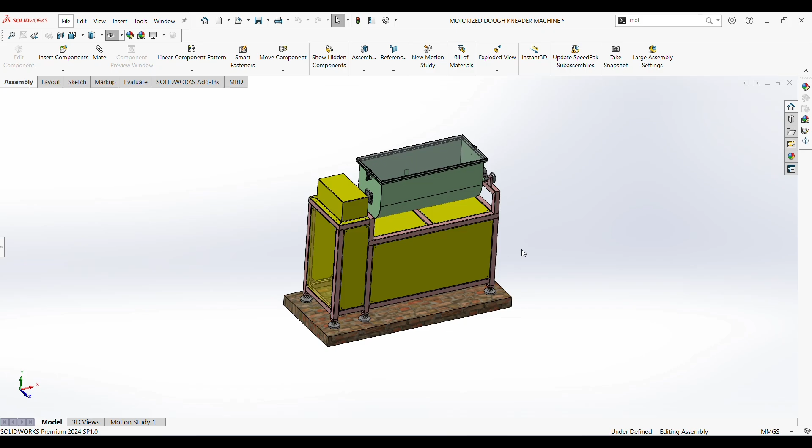In this machine, we optimize our previous machine by removing the manually operated handle and using a motor, which reduces human intervention in operating the dough, increases our production, and reduces human effort. This is the optimized version of our previous manually operated dough kneader machine.

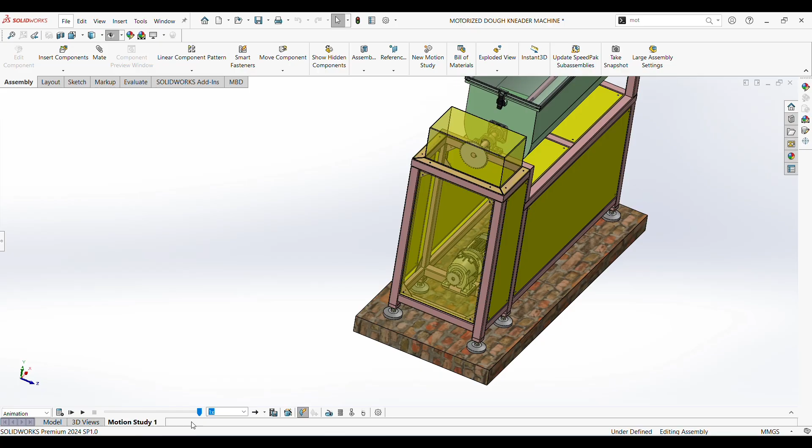So let's see the working of this motorized dough kneader machine. We will go into motion study and play it. This is our working for the motorized dough kneader machine. As you can see, we don't have to rotate our handle to operate this shaft for mixing the dough.

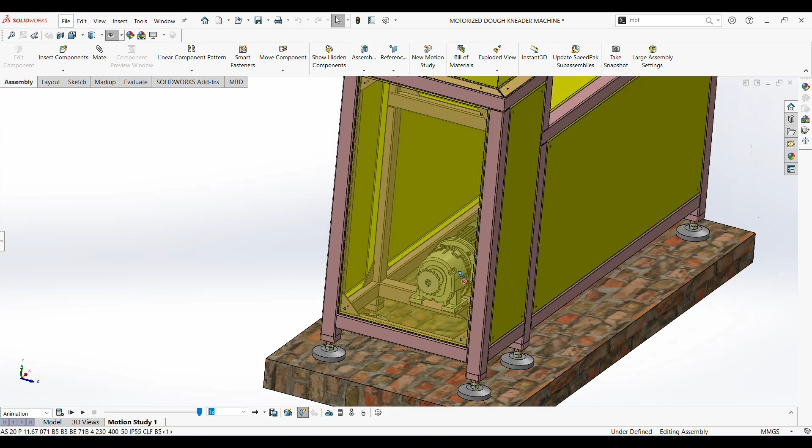Let's see which motor gearbox we have used. This is an inline type AC induction geared motor, and for specification we will see this is the specification of our motor gearbox.

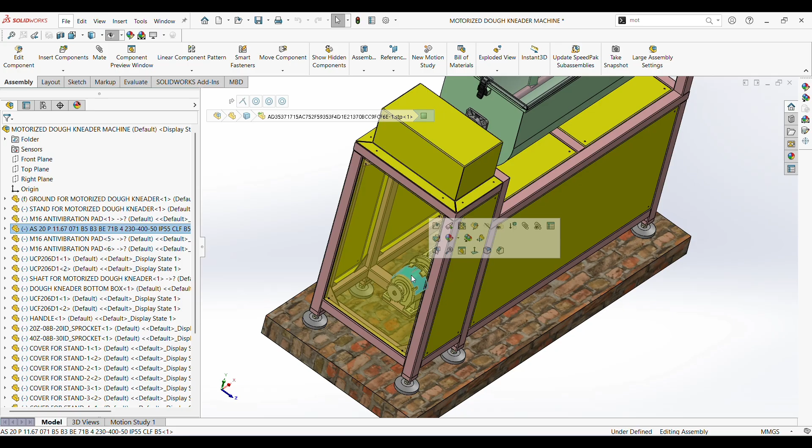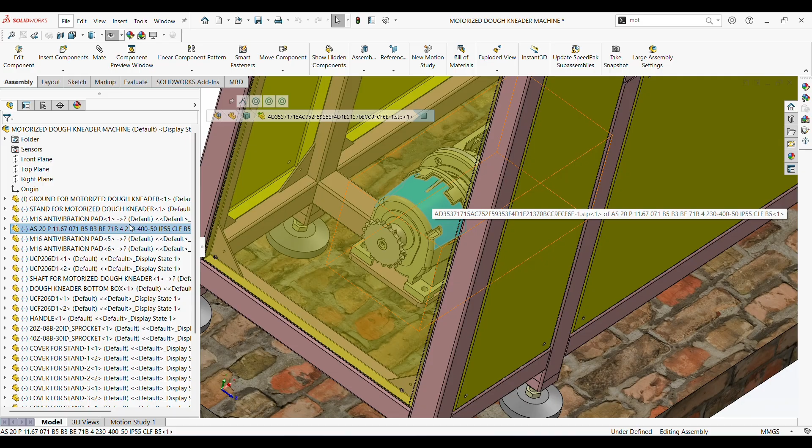Let me tell you what this denotes. AS20 is the gearbox product series. P denotes the foot mounting of this gearbox, whereas 11.67 is the gear ratio of this gearbox, and 071 is the input configuration of the gearbox. B5 and B3 denote motor mounting and mounting position. BE denotes the product series of our AC induction motor, and 71B denotes the frame size of the same motor.

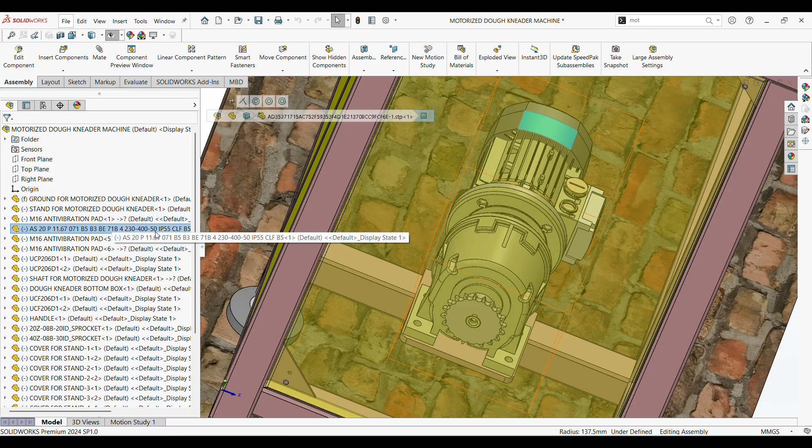Here, 4 denotes the number of poles of our motor, and 230/400 denotes the voltage and frequency. These two voltages are different types, star and delta, and 50 denotes the frequency of this motor. IP55 is the degree of protection of this motor. CLF is the insulation class, whereas B5 denotes the motor mounting flange.

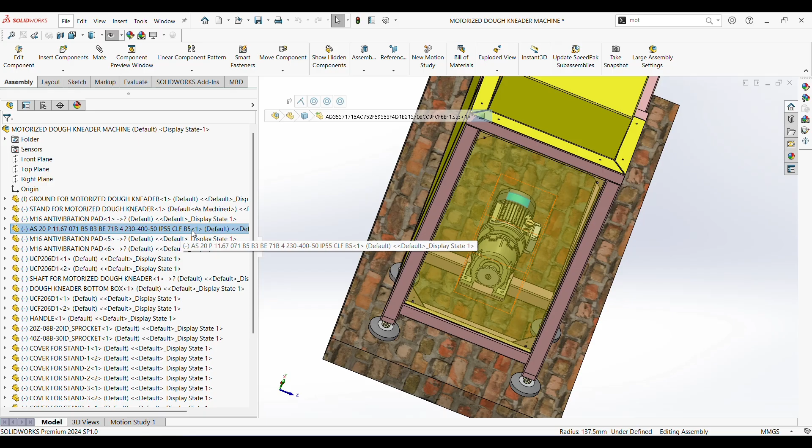This is the product name, not the data sheet. Full name of this product: AS series gear motor. For further detail, we will see the product data sheet of this motor gearbox.

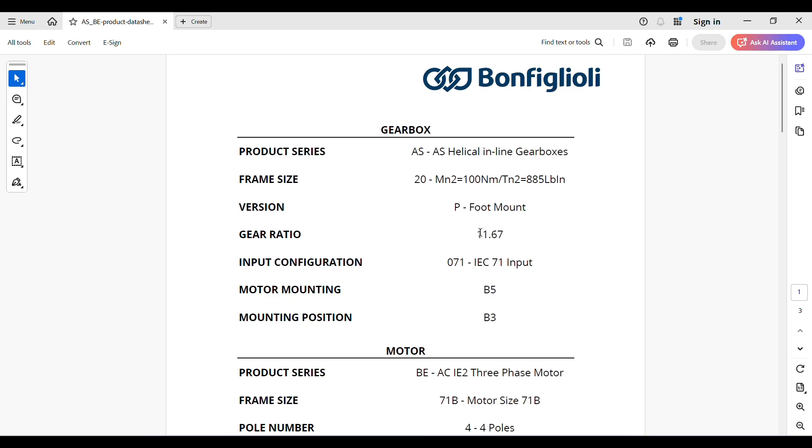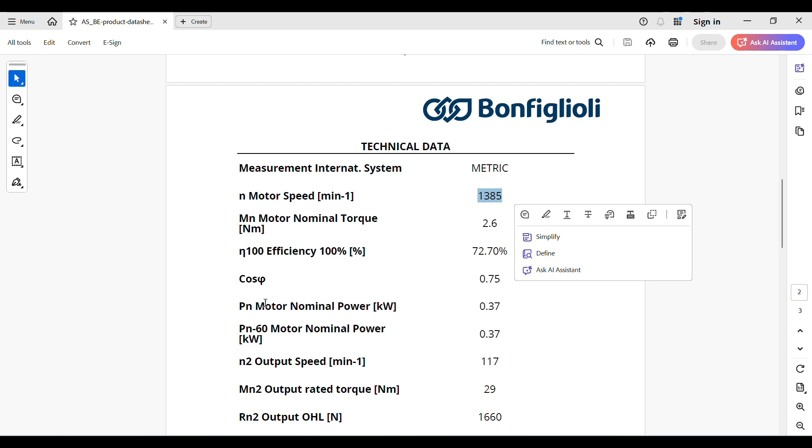So this is the data sheet: AS type helical inline gearbox, and the gear ratio is 11.67. Let's see the output RPM of our motor, which is around 1385, and after dividing by 11.67 we get an output of 117 RPM.

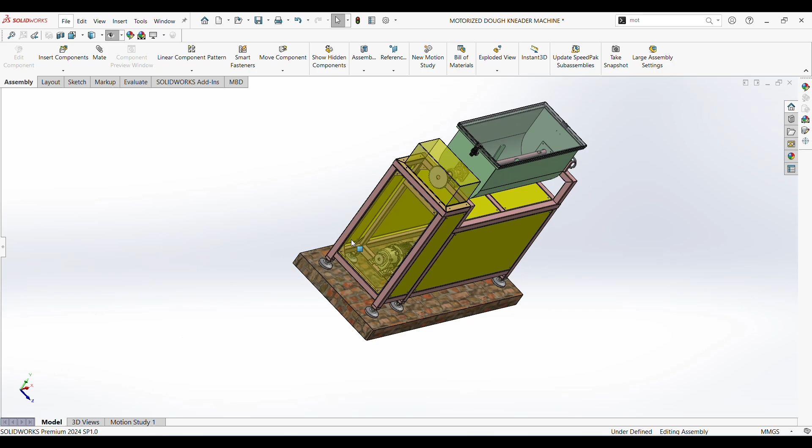So at the sprocket we will get 117 RPM, and after the reduction we will get 59 RPM, because I have used a 0.5 ratio—here I have used 20 teeth, and here I have used 40 teeth. So our reduction will be 0.5, and our output RPM is 59, as you can see in this video.

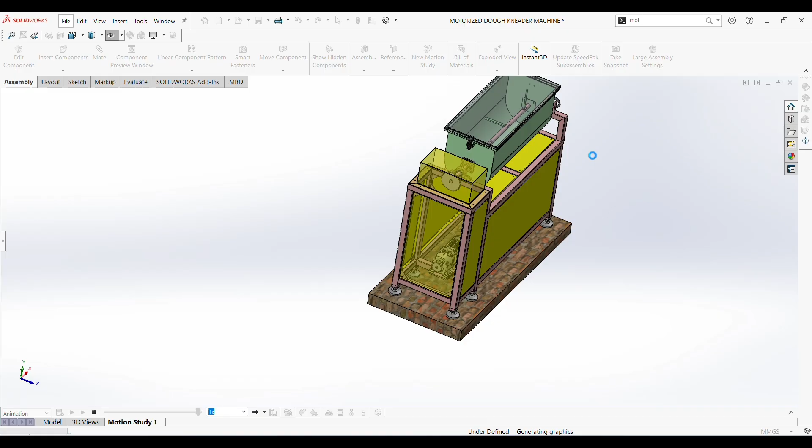So this is basically the working and details of our motorized dough kneader machine. Let's see the assembly of this motorized dough kneader machine. We will start with a new assembly.

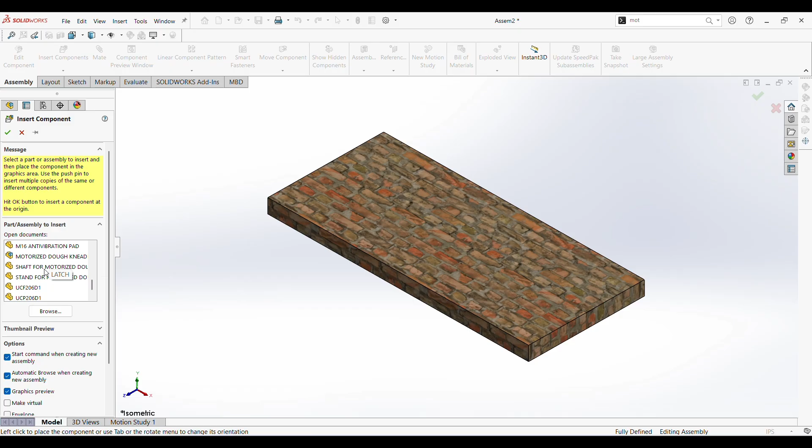First we will insert the ground, which is the base of our dough kneader machine. This is our ground, and after this we'll insert the stand. This is our stand.

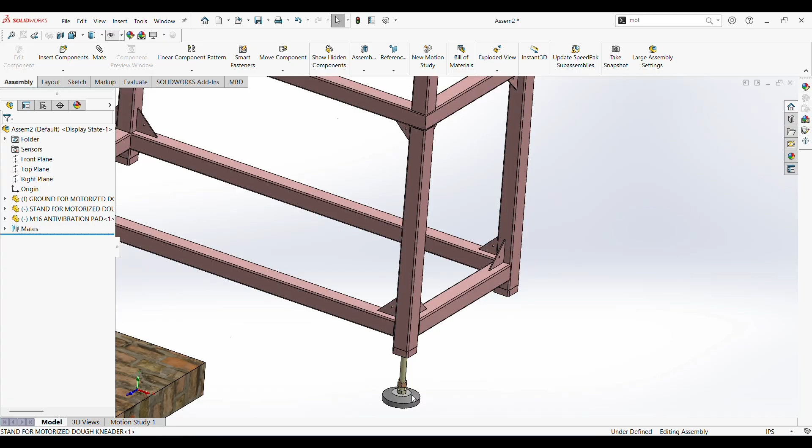Let's hide the unwanted lines and insert our anti-vibration pad, which you can also call a leveling pad. I will locate this using a concentric mate, and then coincide. By doing this, I have located my leveling pad, or anti-vibration pad.

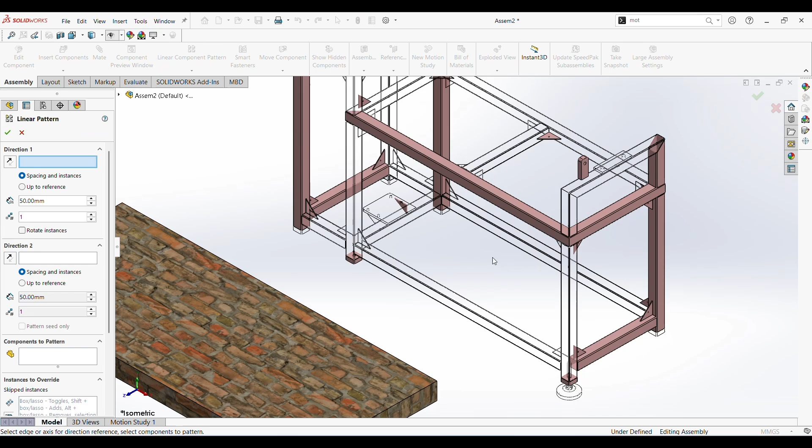So let's see the distance between the two pillars. It is 500, and this is 1230. We will use a linear component pattern to reduce our effort to locate each and every point.

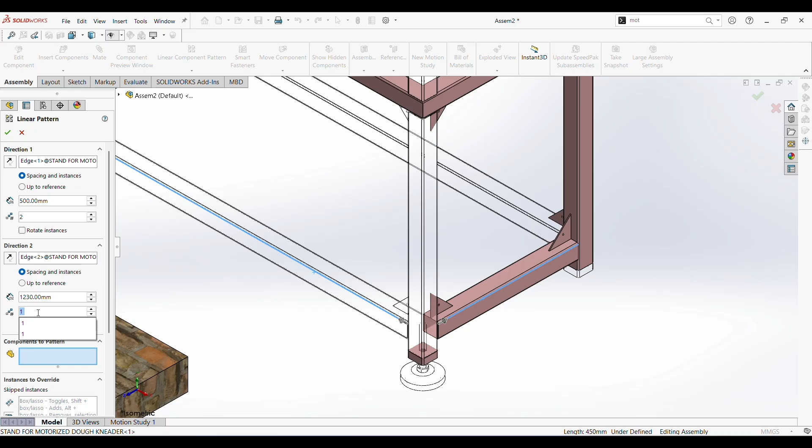Here we will put 500 as we have seen, and here 1230, and select quantity 2 components.

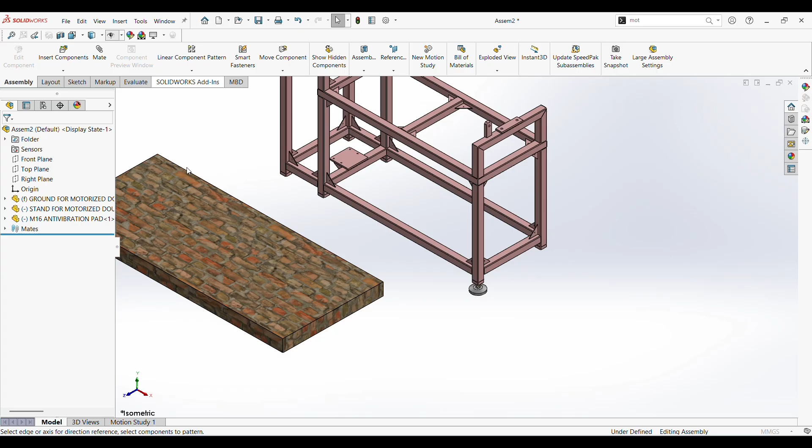Let's see what problem we have. First we will delete this again and do the same procedure again: first select this, then this, then select our product, and then okay. So now everything is okay.

Two positions are also remaining, so for those we will do the same procedure as we did at this point.

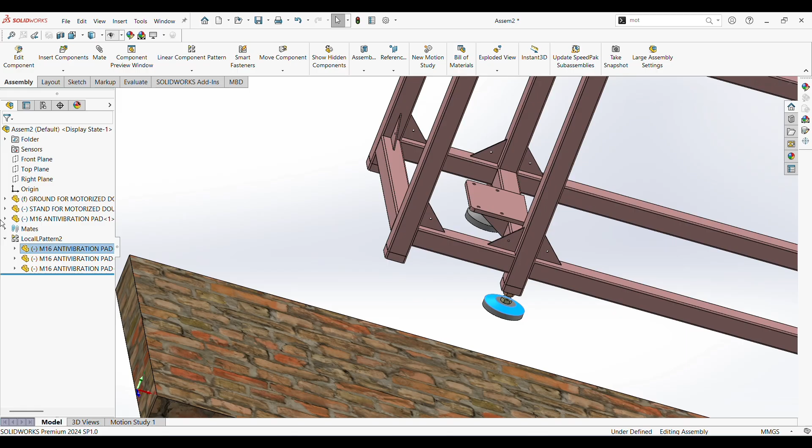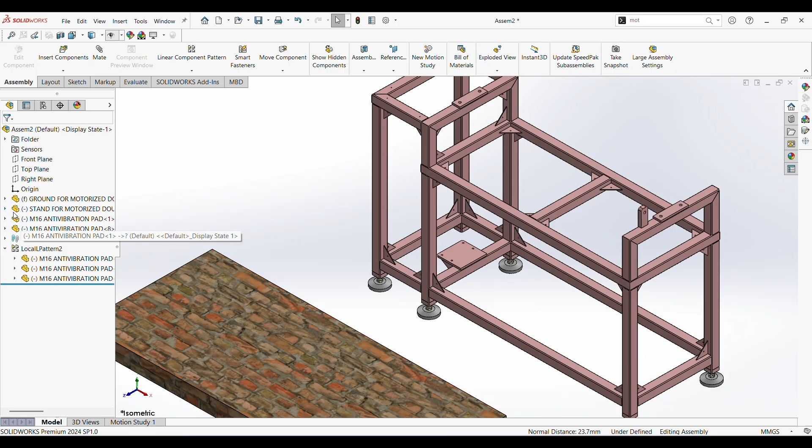So we will take one anti-vibration pad, locate it using concentric mate, and then give coincide mate. By doing this, we locate it, and we have remained with this pillar. For that we again use the local pattern and select - no, we don't do that here. We have to use a new linear component pattern.

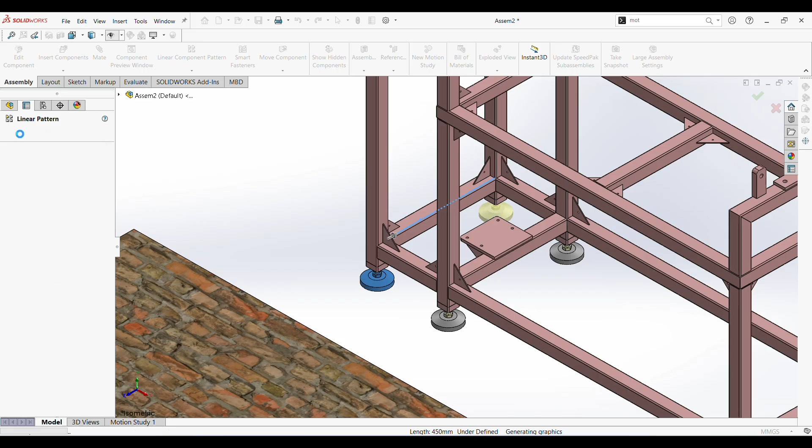First we will select the direction, and then we select our product. By doing this, we have made our starting point, and then we will locate this stand on our ground.

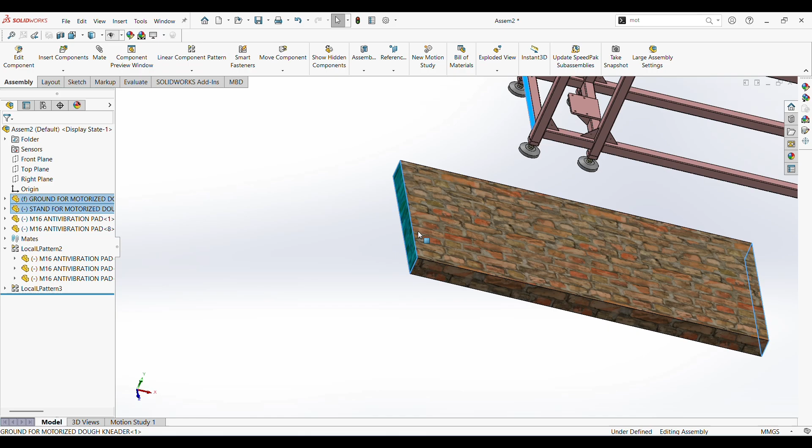First we will do the width mate, and by doing this we have located our stand on the ground. So we have located our stand on the ground.

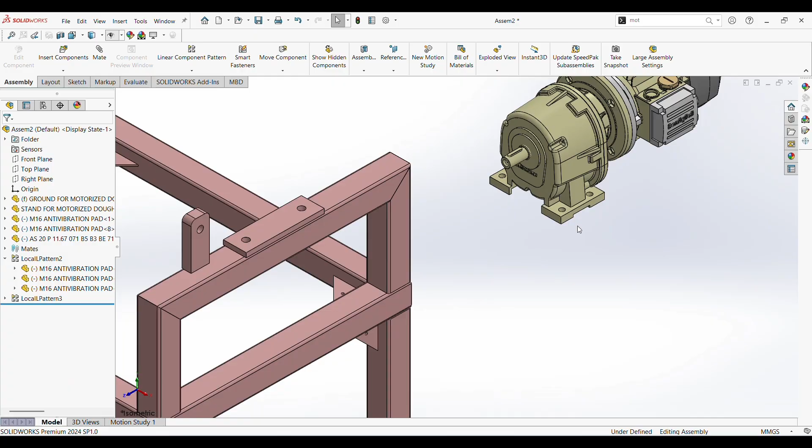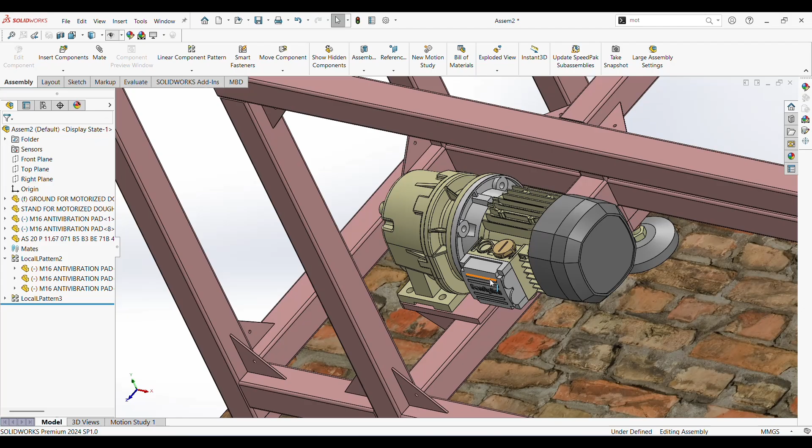Now let's insert our motor, this AS20 series. First we will give coincide mate at its location, and then give concentric mate. Again we will give concentric mate to another point. So we have located our motor gearbox.

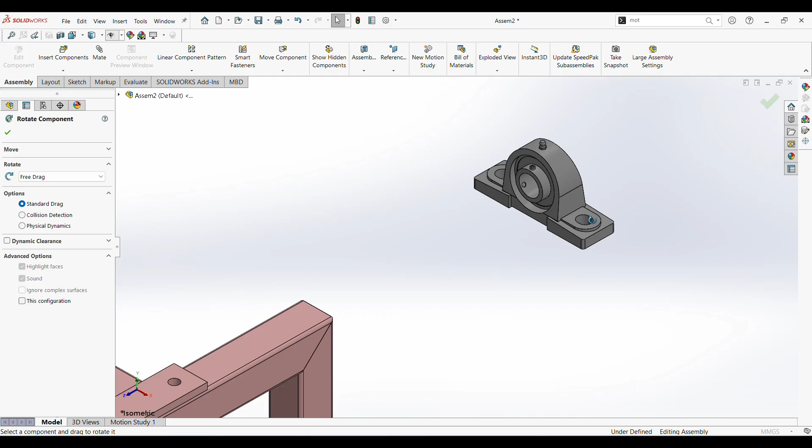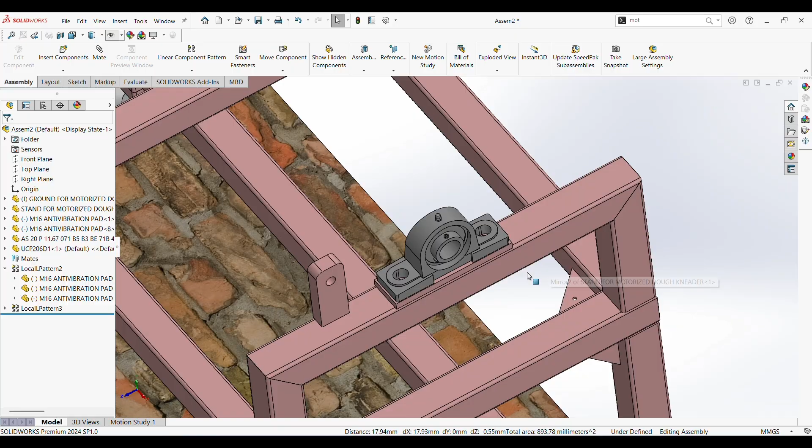Now we will insert our UCP 206 bearing. Let's see, this is our UCP 206. We will point it to its position. First we will give coincident mate, and then center in slot - as you can see here is slot type - and we will do the same for the other position also. So this is how we locate UCP at this point.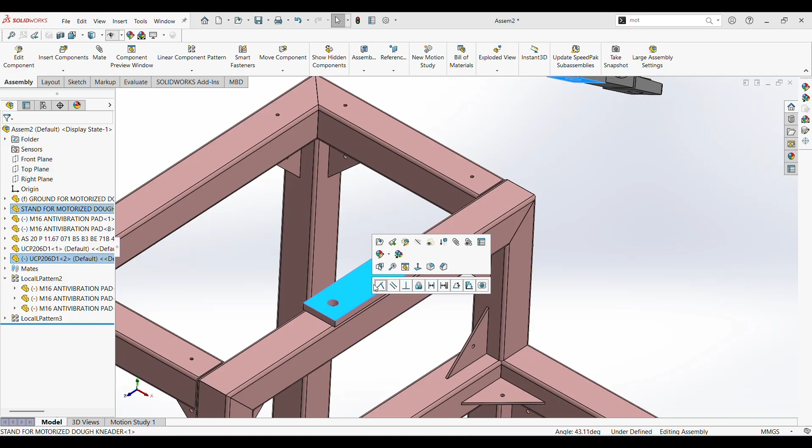Now we will do the same at another position also, which is here. I will rotate this, and now do the same procedure as previously done. Center in slot, okay, again slot, and this is how it is located.

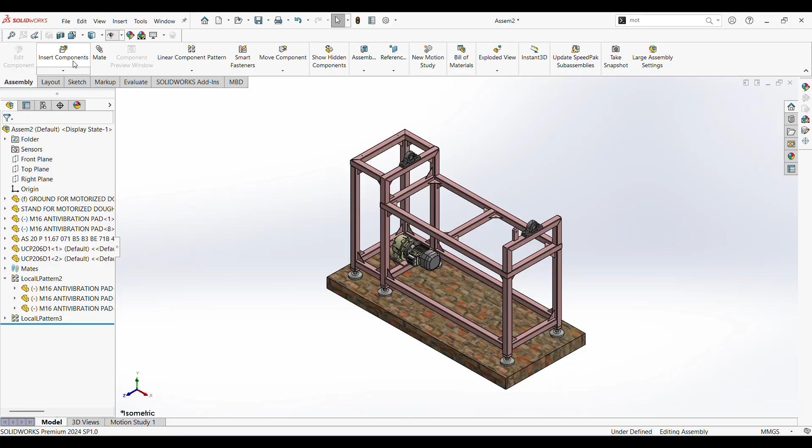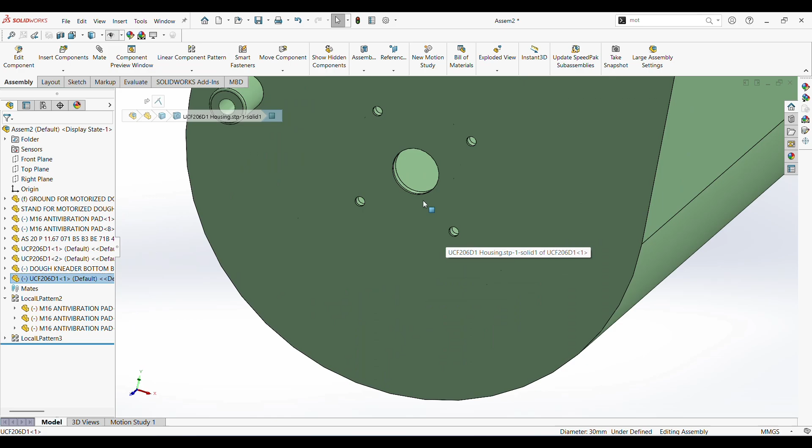Now it's time to add our bottom box and UCF 206 bearing. First we will give the coincide mate, and then locate the center. Now the mounting position we locate, and this is how the UCF 206 is mounted on our bottom piece.

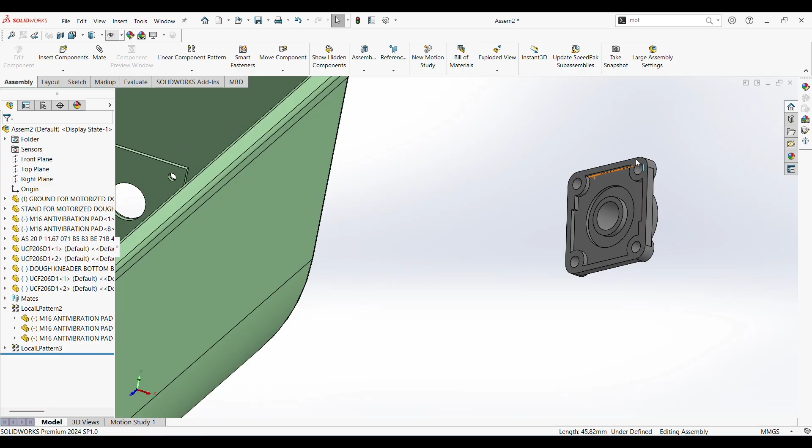Now we will take one again. Let's rotate and do the same procedure as previously done. Coincide, locate at its center, and locate the mounting position using concentric mate. So this is how we located our bottom piece of this dough kneader machine.

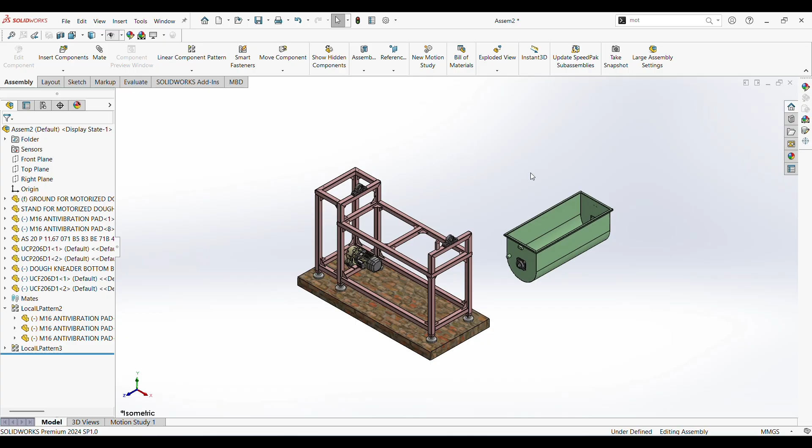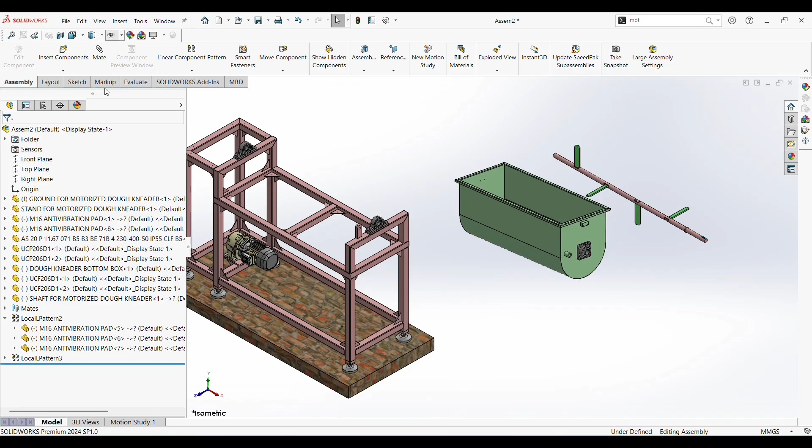So we will rotate this dough kneader. Now we will insert our shaft. Let's see, this is the shaft. So this is our shaft, and now we will rotate this shaft because we want this position on this side.

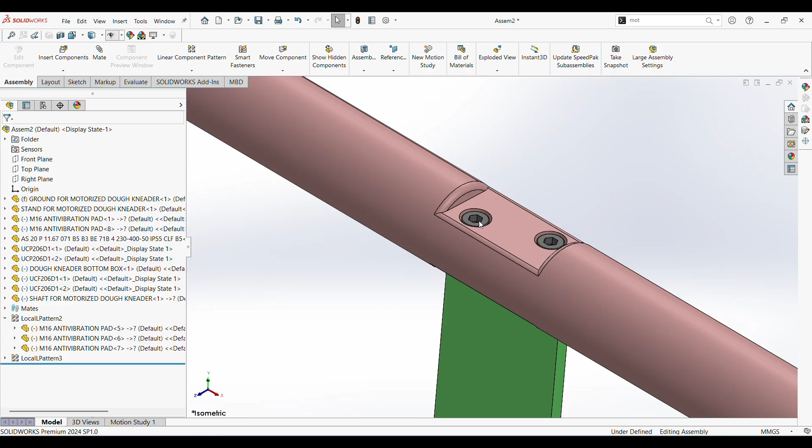As I have previously told, this is not a single part as we are inserting it in SolidWorks, but in practical we are going to nut bolt these plates with the shaft. So it will be done after inserting this bottom piece in the box. So let's locate by giving concentric mate.

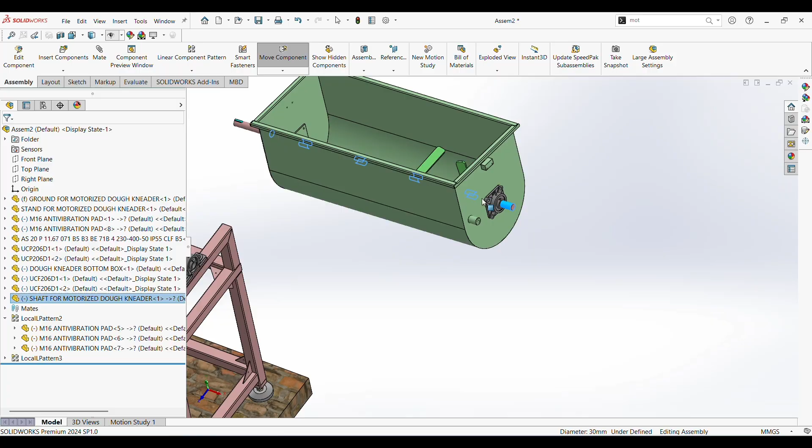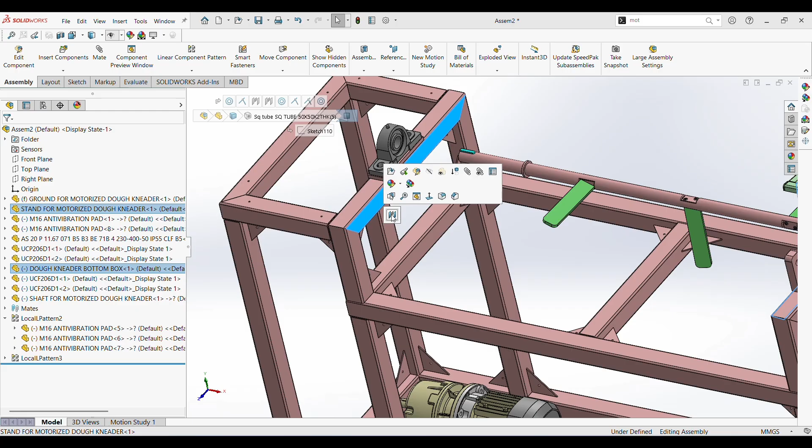So this we have located. Now we will give concentric mate with the UCP bearing, and first we will locate this bottom box using width mate, and after that we'll give coincide mate to this shaft.

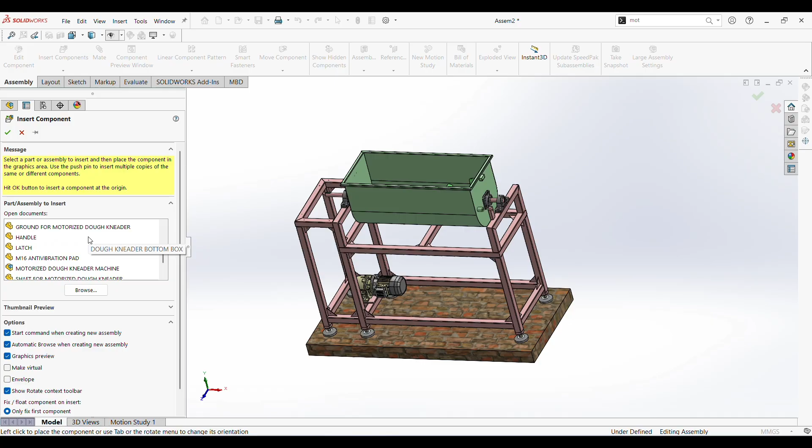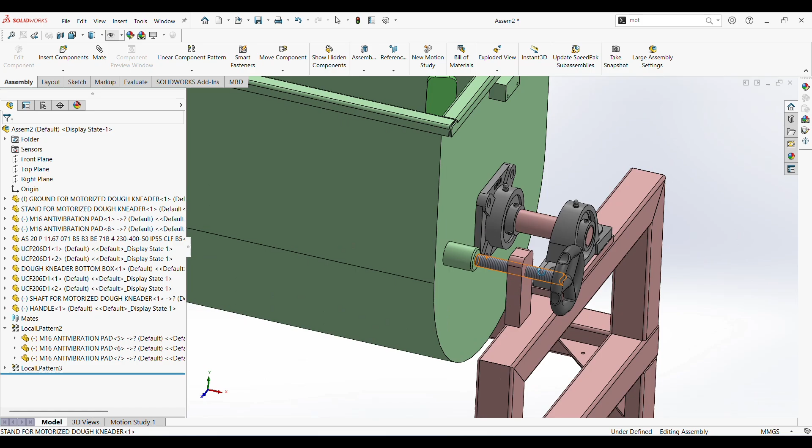Now you see the shaft is also located and the bottom box is also located, but as you can see there is degree of freedom in this bottom box. So for locking this degree of freedom, we will insert one knob which we can call a handle. This will reduce, or you can say lock, this degree of freedom. So we will give concentric mate with this, and as you can see, this bottom box is totally locked.

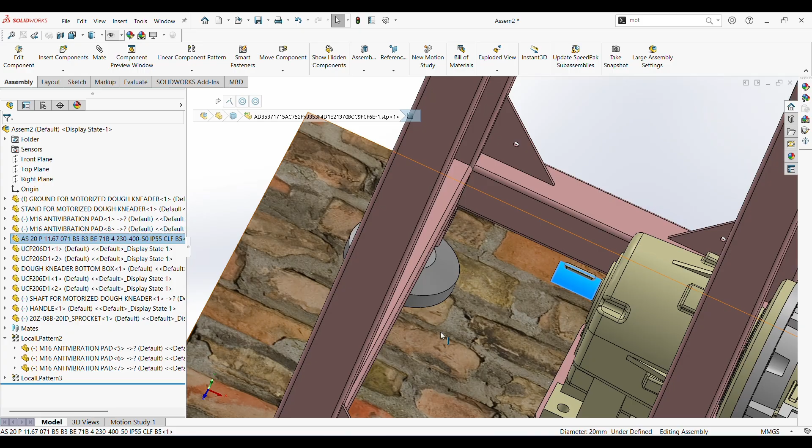Now we will insert our sprockets. These are the two sprockets - one is of 20 teeth and 08B series with 20 ID, because motor diameter is 20. So I have selected this.

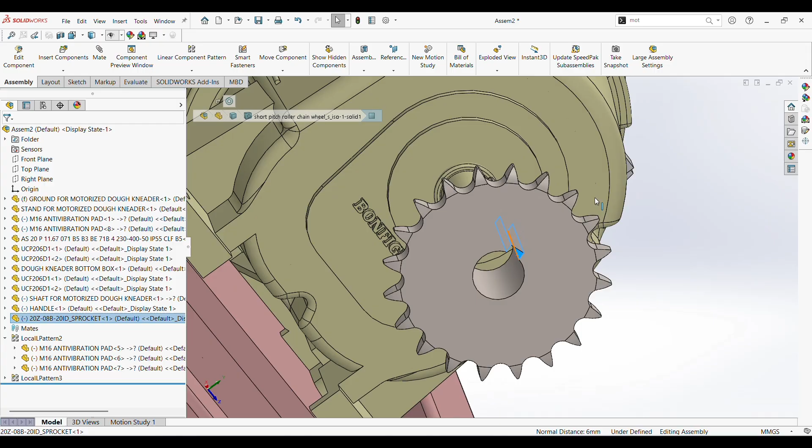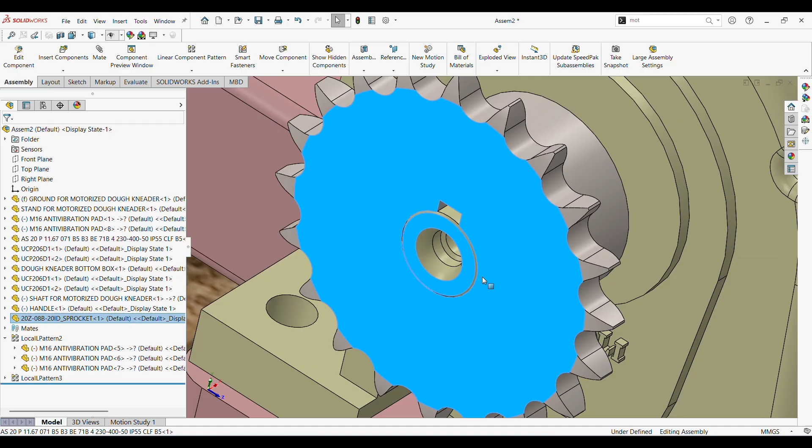Let's rotate and locate at the motor gearbox position. First we will give concentric mate, and after that we will give width mate to the keyway with the key of the motor gearbox. Then we will give coincide mate with the shaft, not with the motor, because there will be a minor error. You see, we have a 0.2 mm difference.

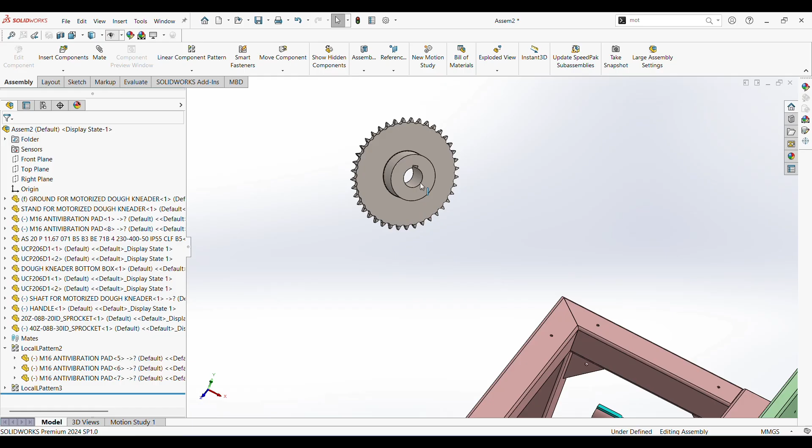So we have added a sprocket of 20 teeth. Now it's time for the shaft sprocket, which is 40 teeth and 08B series. Let's rotate and locate it on the shaft. First we will give the concentric mate, and do the same as we did with the motor gearbox.

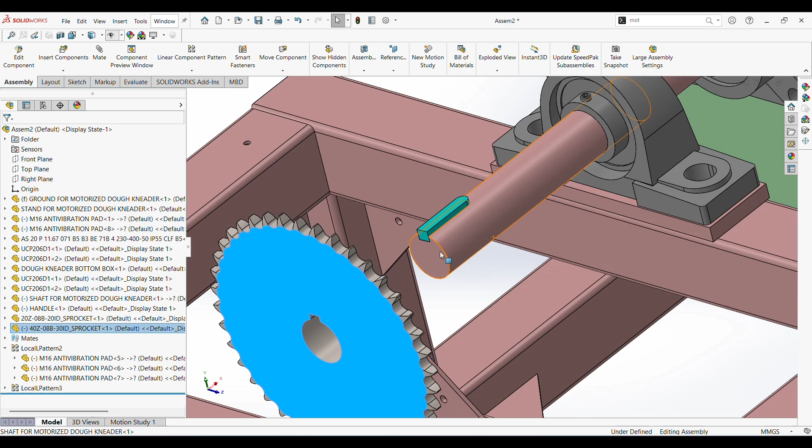Width mate, and coincide with the shaft. So this is how we located our sprocket 2. But as you can see, if I give a width mate on this, we can't rotate it. So first we will delete that width mate, because if we don't delete it, we can't rotate our sprocket.

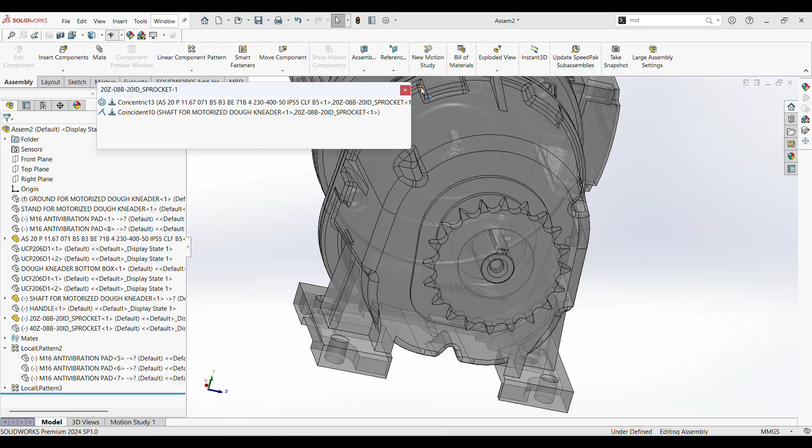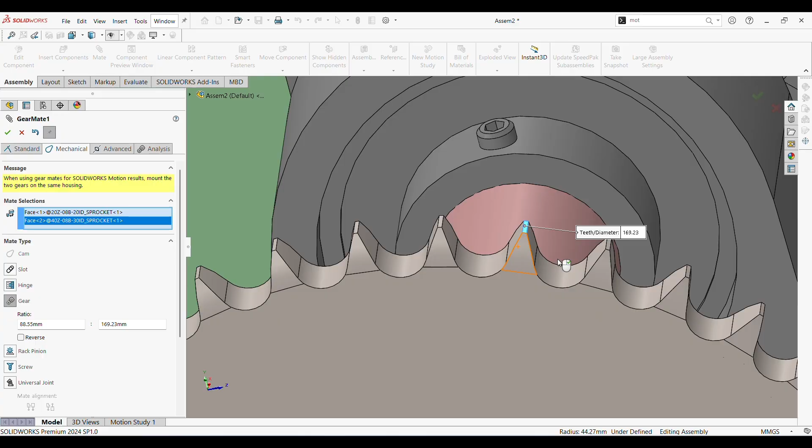So let's delete that and give one gear mate to this sprocket. We will go into mechanical gear mate and select the top surface of sprocket 1, the top surface of sprocket 2, and give the gear ratio 20, and here is 40.

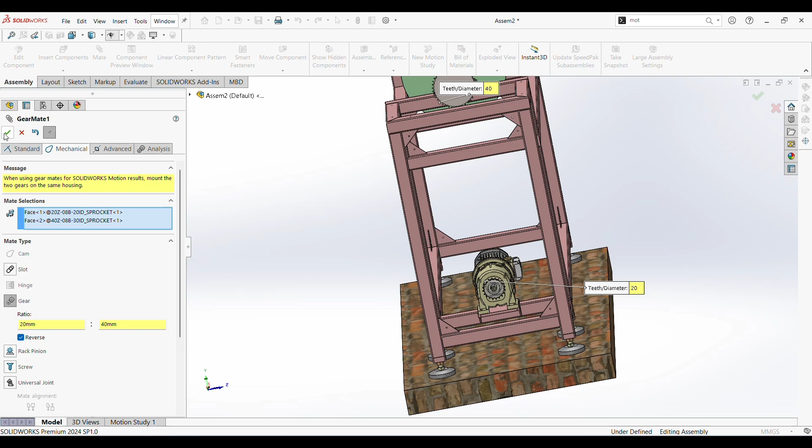Okay, now let's see how the rotation is. If I rotate this in clockwise direction, sprocket 2 is rotating in anti-clockwise direction, which practically will not happen. So we have to edit that mate. We will edit feature, it is suppressed, edit feature, and do the reverse, okay. Let's see again. Now it is rotating in the same direction as sprocket 1.

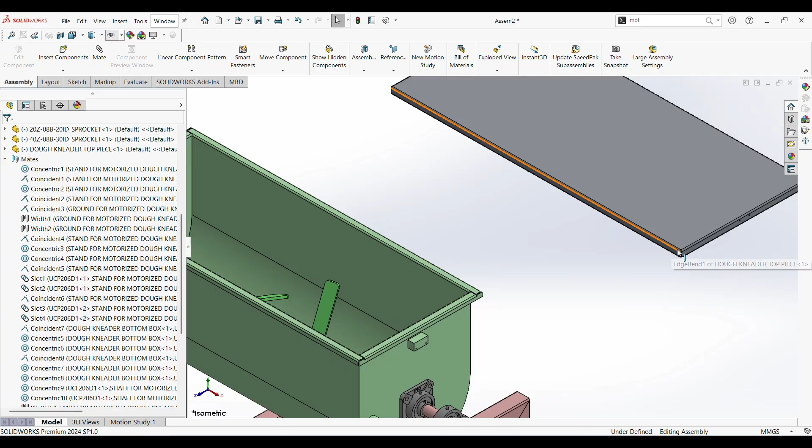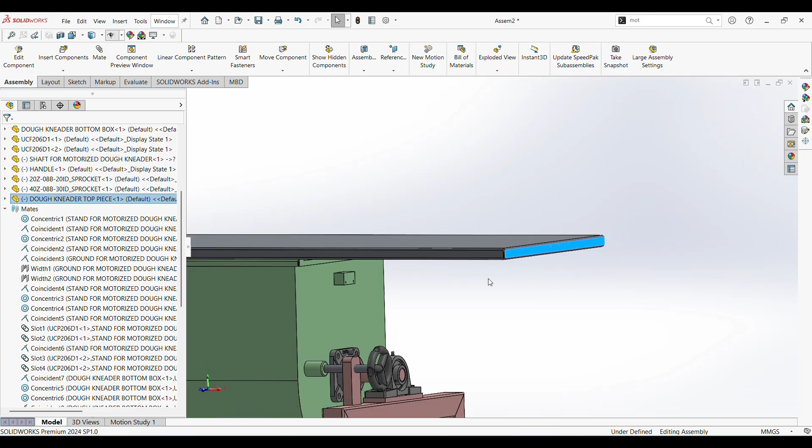So let's go to the next step, which is insertion of the top box. This is our top piece, so we will locate it in its position. First we will give coincide, and then we will give width mate, and this is how we locate our top box with our bottom box.

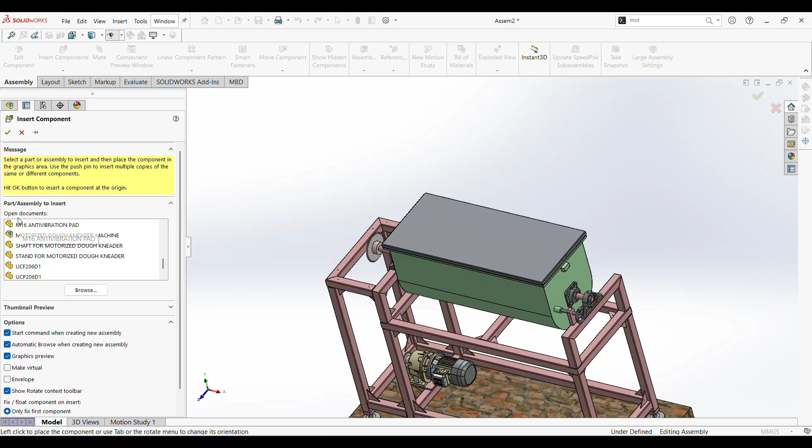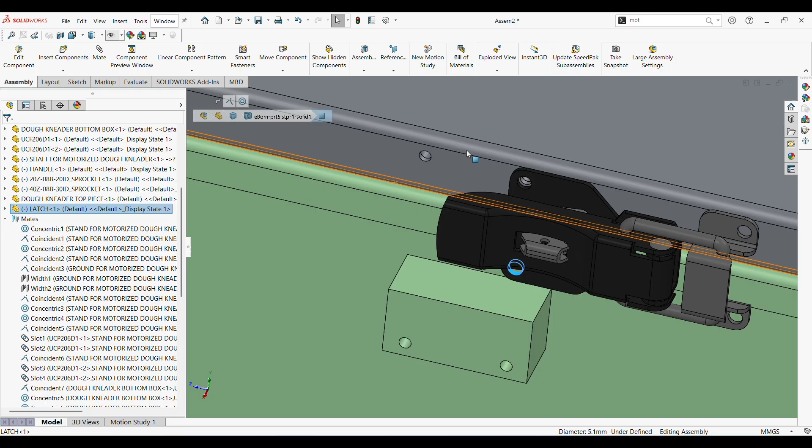But as you can see, anyone can remove this top piece. So to lock this top piece, we use one latch. Let's insert that latch also. This is our latch. First we will give coincident mate, and then we will give concentric mate, and this is how our latch one got located.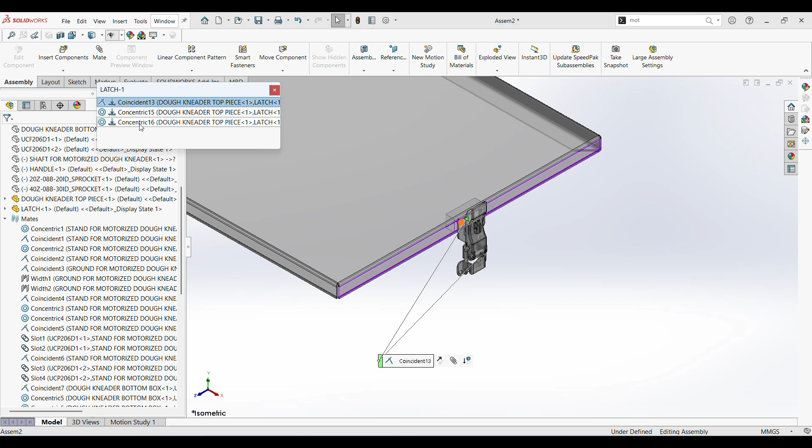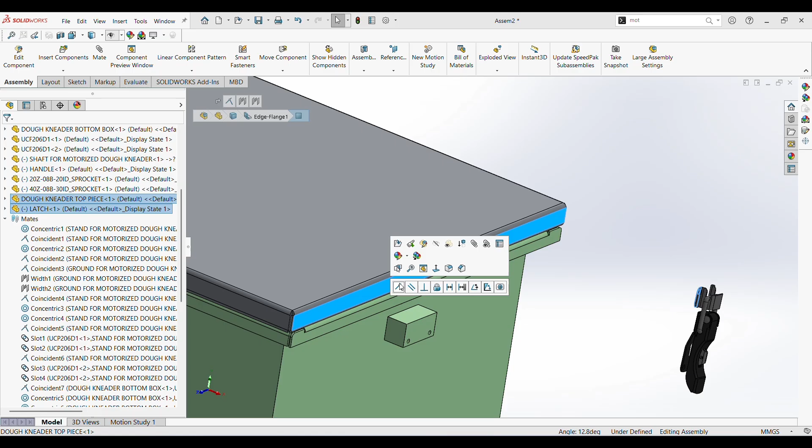So it got opposite. We will remove all the mates and do the same procedure again. First coincident, and then concentric, and same for this. So our latch one is located, and we will do the same for the opposite side.

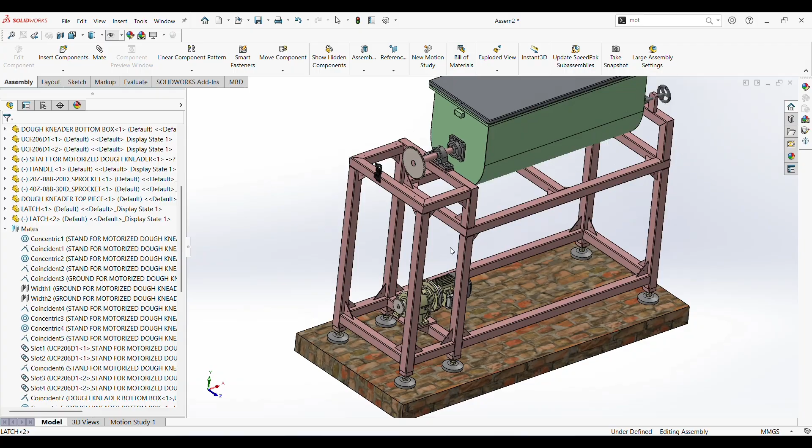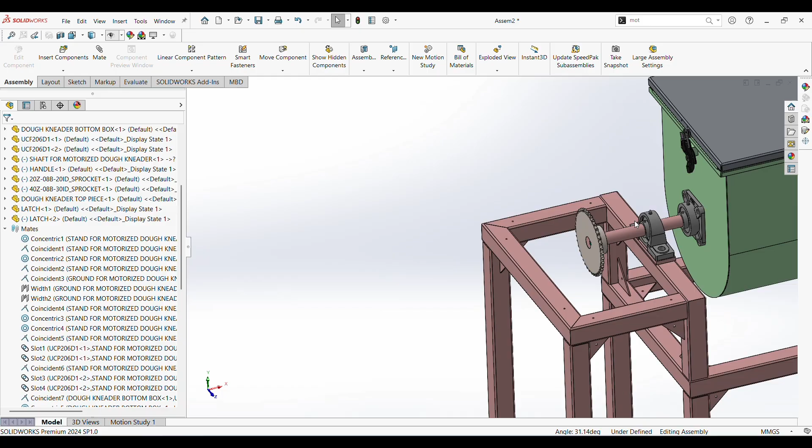Rotate it, and now relocate it. First we will give the same as previously, which is coincident mate, and then we will give concentric mate, and this is how we have made our dough kneader machine.

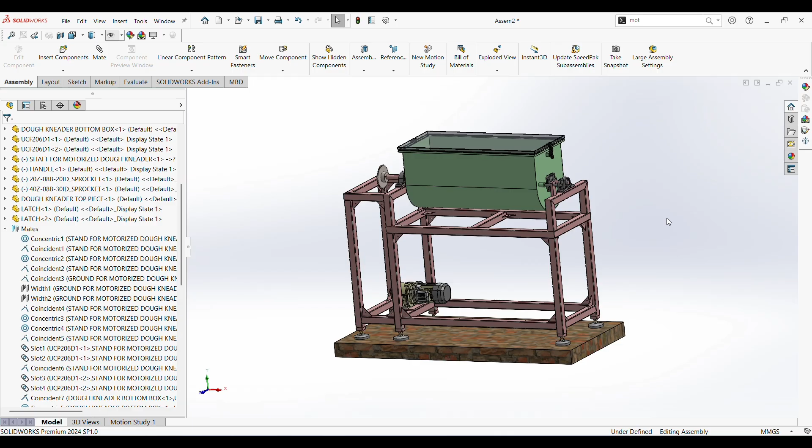The covers we have shown in the main assembly. We are not going to show them here also, because this will take time and it is not necessary. If you want, you can add that. I am just doing this for your understanding.

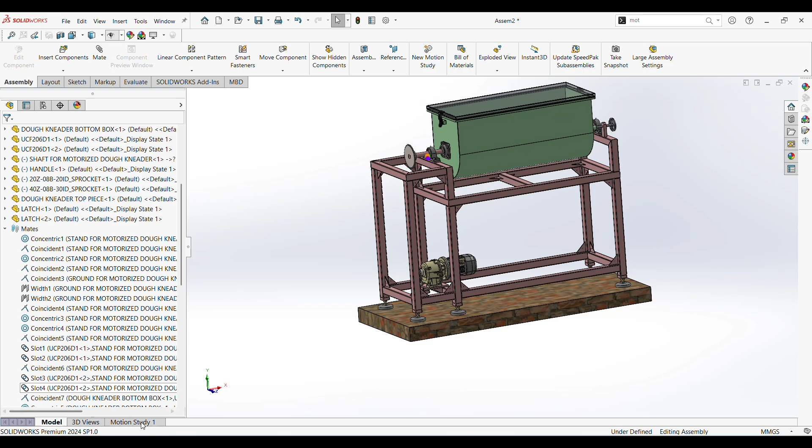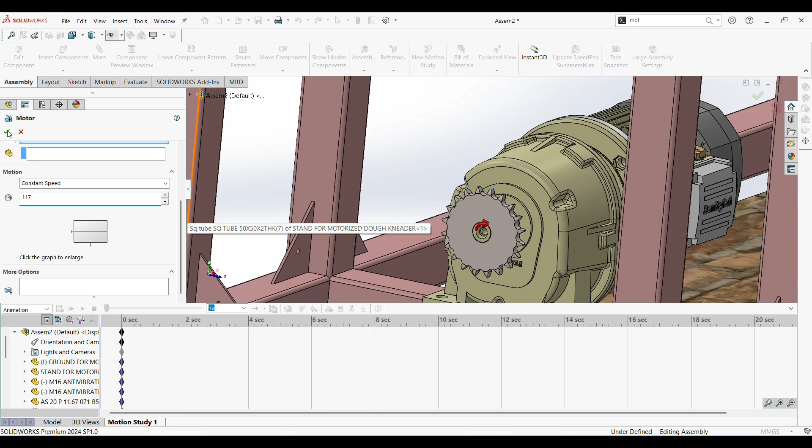Okay, so let's see the final step, which is the motion study. Let's see how we will give our motion study. So you start motion study, and we'll select this motor and give it to our sprocket. This is our rotating part, and we will give speed of 117, as we have seen in the product data sheet of the motor gearbox. We will say okay, and we will get the timing, but we will increase this time to 10 seconds.

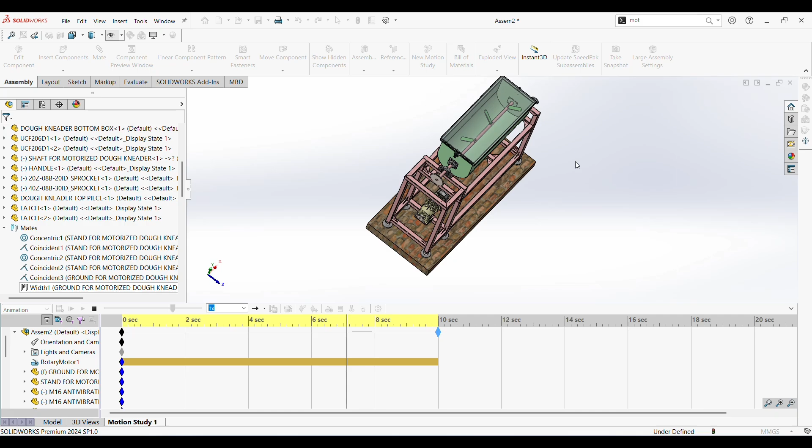Okay, so let's play. As you can see, the kneading process is successful. Let's see again. Okay, so this is the working of our dough kneader machine.

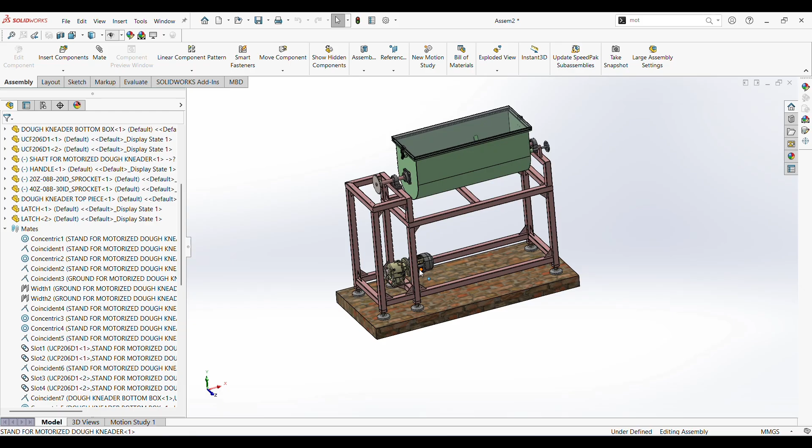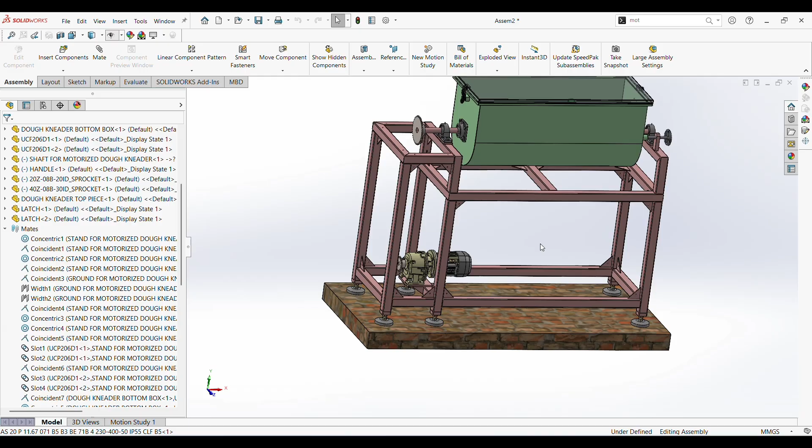So this is how we have done the working and assembly of our dough kneader machine. We have used a cover for protection from the moving parts. In this, we are not using that cover, but you can use the cover if anything is movable, because it will be injurious if you do not use the cover in this assembly. So I am doing only the skeleton model for understanding. But if you are going to make this model, please make that cover which I have shown you in the assembly. Okay.